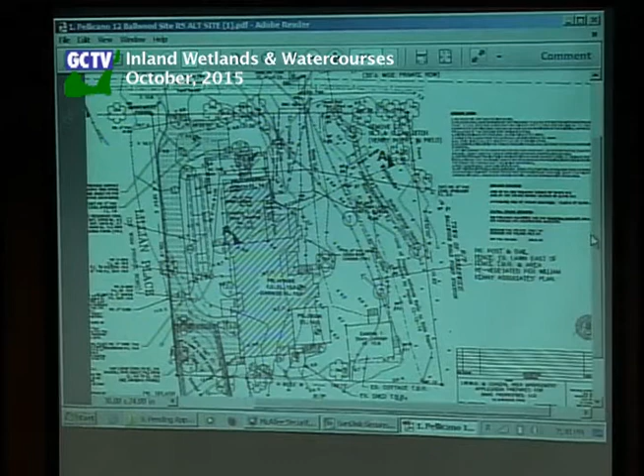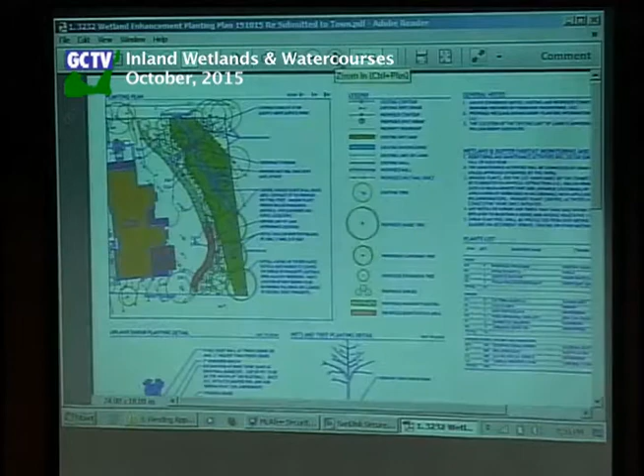The planting plan associated with the buffer, you would have in your packet as well. Doreen, do we have Bill Kenny's planting plan? Thank you.

So again, this is an illustration of the expanded buffer in areas where the residents don't need to use the land, being the north and south ends of the property. With the elimination of the cottage, additional area is available for planting and protecting the wetland to a greater extent.

Also today, I received an email from Ann Stoley. Is Ann here this evening? No. In summary, Ms. Stoley lists a fair number of issues associated with the Ballwood neighborhood, lighthouse, and ledge, consistent with the concerns we have heard from the public over the course of this application review—namely that those neighborhoods are subject to flooding, and their concern remains high regarding the flooding potential this development could bring.

There was emphasis that this applicant should be cleaning out more than just the watercourse on site, which is proposed as part of the application. In fact, the applicant should be looking at areas on town property next door, catch basins, and the like. I did forward this email to our Department of Public Works as well as the applicant's team so they were aware of the concerns, and perhaps they'll speak to it, perhaps not.

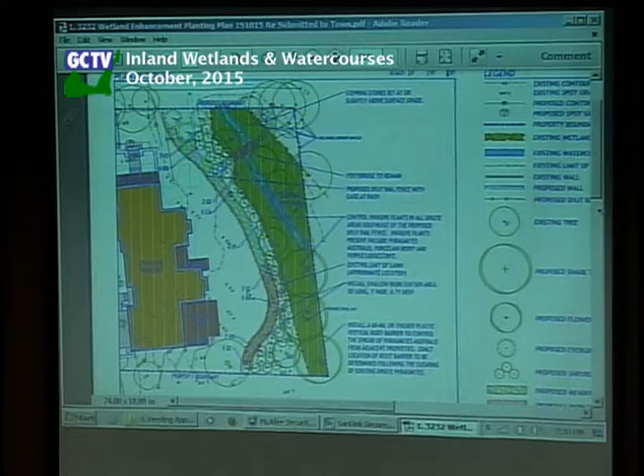I did hear back from Mr. Marucci of DPW, who said that the items here outside the premises of 12 Ballwood would not be the responsibility of the applicant, but instead would be the responsibility of the town. The prudent course of action would be to set up a meeting with the engineering department and Amy Siebert, the commissioner of DPW, and start to work on the issues from a whole perspective. In fact, it's not the responsibility of this applicant to take that on.

I believe that summarizes it. With the additional information submitted by the applicant, I feel comfortable that the feasible and prudent alternatives have been investigated, and there's been adequate demonstration why, for prudent engineering and feasibility reasons, other configurations of the driveway do not work, and that the increased buffer and protection of the wetland is in fact a more balanced use of the property than previously submitted. I would recommend approval with the special conditions listed in the staff report and the standard conditions that are our norm.

Okay, thank you, Pat. Welcome. Good evening, Mr. Chairman, members of the agency. For the record, John Hegney. We've reviewed Director Sesto's report. We agree with her findings. We are comfortable with the conditions, and we would ask for your approval.

Are there any agency questions for Mr. Hegney regarding this application as presented tonight? No? Okay, thank you. Are there any public questions or comments on this application? Okay, please come forward.

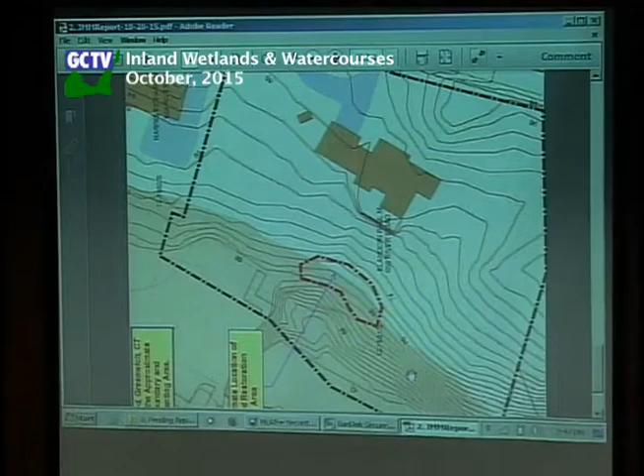But also part of the cease and correct was the area shown in red on the map, where some trees were removed associated with the Mianus River wetlands. I had no disagreement with the delineation done along the Mianus River. So, as Doreen said, we came up with, by her direction, 10 plant species and some trees, and I also added some larger shrubs. I thought it would add a little diversity.

I'm not sure how many folks have been to the site, but it's a full canopy while the understory is very open. So I figured not to block Mr. Blandori's view of the pond and the river, but also to add a little structure to the area. That was my reasoning behind adding some of the larger shrubs.

The off-site area, we reviewed that as well. The berm, I don't know when it was installed, but it was new. The ditch was clearly dug recently. There was some evidence of soil disturbance there in the past, and clearly the road has been discharging there for some time.

We again reviewed those soils, and by and large, we determined those soils to be of a somewhat poorly drained to moderately well-drained nature, and not a regulated area. But it does, and it will continue to, because the water is going to continue to go to the area, receive runoff essentially from River Road.

So can I ask you, are there any conditions in the staff report that you disagree with? No, I don't. I agree with everything that Doreen has said.

And we welcome staff to come on out and review the plantings prior to going in, or during going in, to make sure it was done correctly.

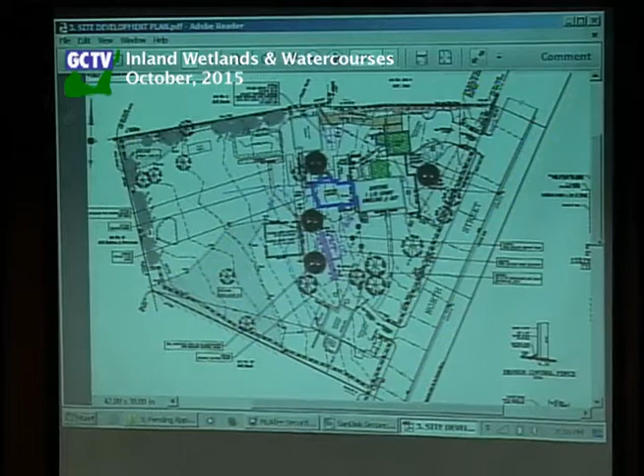So in the staff comments, there are conditions called out for the approval of the application, and the specific special condition is that a mitigation plan be prepared and submitted depicting 2 to 2.5 inch caliper native shade trees placed 25 feet on center within the portions of the wetland committed to being a meadow, in connection with the Inland Wetlands and Watercourse application 2005-45. There's a typo there.

So that would be my comments and my proposal. Welcome, good evening. Pete Finkmeyer with Soundview.

I spoke with my client this afternoon concerning the recommended conditions of approval, and the client has certainly conceded to the planting plan and putting in the trees and everything else in the staff report. Okay, let me be clear on that before I proceed.

A minor detail, if I may argue. Number 9 at the bottom of the special conditions, or 7, 8, and 9. Seven has to do with my certifications at the end of the project as part of the CO. Number 8 has to do with what the engineering division now requires, which we call the operations and maintenance plan, and includes inspection by engineers, logs, and everything else cited.

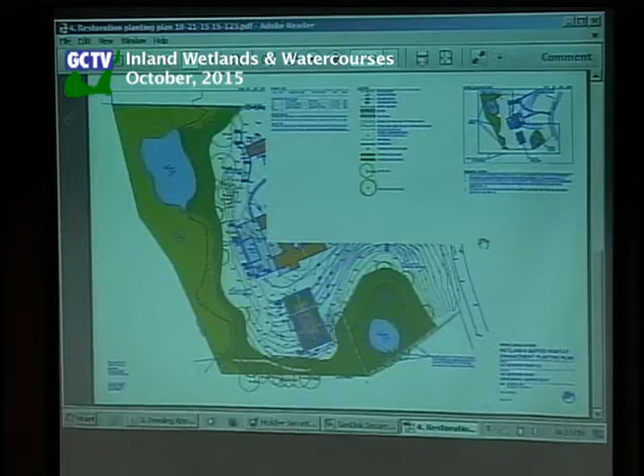Does any of that discussion have the potential to help with a decision this evening? Probably not. I'm not speaking for myself, but I guess my feeling is I think a prudent and feasible alternative could be slightly rotating the court to pull it away from the wetland. So I would like to see an investigation of that.

The only part that's in there is this little bit here. Anything else? Are there any other questions for the applicant from us? Is there any public comment or questions on this application?

Motion to delay? Is there a second to delay? Second. Okay, Stefan was in there first. All in favor? Aye. Okay, thank you. It's unfortunate.

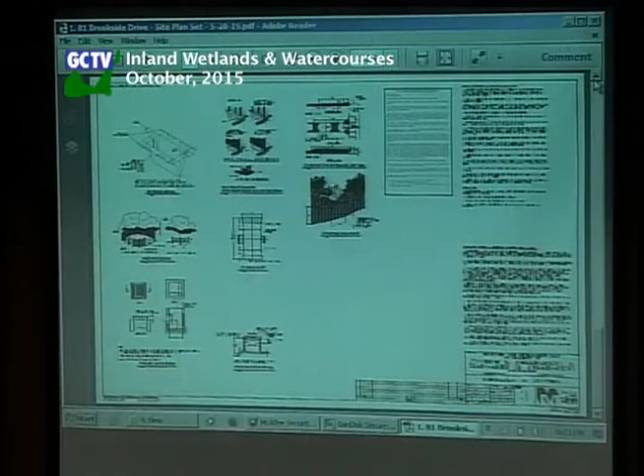2015-080, 81 Brookside Drive, S.E. Minor & Co., for Joseph and Margaret Pellegrino, for piping of a watercourse. This application actually might easily have been up with pending applications. It's been hanging with us for a pretty long time, and it was withdrawn this afternoon. Okay, so it's done. Very good.

2015-128, 33 Loeb Pond Road. S.E. Minor and Company for Paul Roche, for the construction of a pool house, carriage house, driveway, and drainage system, 40 feet from a pond.

Right, the agenda was not revised per changes that the applicant has made to their application. Since the application was made, they've eliminated the pool and the pool house from the proposal. I think there's also an infiltration system, maybe, or there was a meadow proposed to take drainage from that, and that's been taken off. So all those activities were in the woods over here.

Staff had some major issues with that proposal, so I'm happy to see that it's not on the plan, and if in the future the property owner wants to apply for a pool, they might explore putting it off the back of their house, holding it up with a retaining wall or something, which is a very common way to do it that I've seen around town on sloping sites like this.

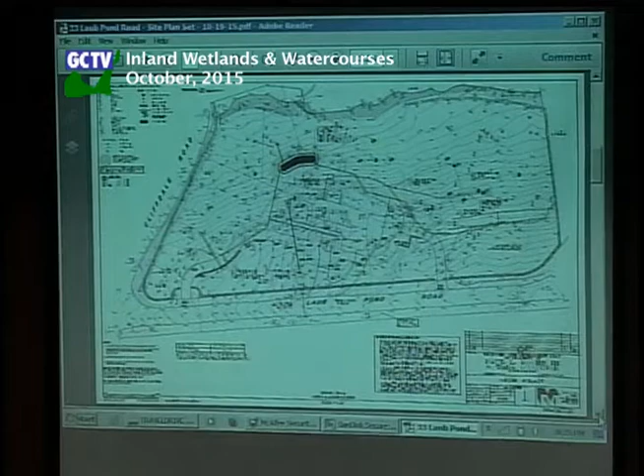There is some gully erosion to the south of the house that I've recommended the applicant repair, and I put a deadline on that - that's special condition number 1 - by October 31st of next year, whether or not the activities are implemented. So whether the driveway is built or anything else is done, this gully has to be fixed.

So after speaking with Mr. Marucci, if the agency feels comfortable adding that condition of prior review and approval by engineering, I'd recommend the agency issue a permit with the conditions in the staff report.

Are you attempting a sizable basement on this property, given the high groundwater? The basement isn't a very big footprint—this piece right here is the garage, so it's not a very large basement. We're kind of restricted because we had to move the house forward, and we have limited usable area on the site.

Is there a sump pump associated with the basement? Yeah, we have a sump pit or structure that will be connected to under-drains underneath the slab, and then it'll be pumped up into the storm drain. So it will not be going into the detention portion of the storm system? No, it will not. The detention stops at a wall in this structure, and the control structures are on this side of that wall, but the pump will go to the other side, unrestricted, out to the storm drain.

And where does the storm drain discharge? It goes into Long Island Sound, but I don't know exactly—it heads in the south direction. So you don't know the... but it is the true outflow? No, it's a true storm drain, an 18-inch clay pipe, I believe.

And the roof leaders, do they feed into it? Yep, all go to the roof storm drain, or leaders. We're kind of reversing—all the water from the house roof will drain back to the rain garden from this side as well as from this side. And we receive water from adjoining properties here, here, and there, which all feed into the rain garden. Even the back end of the lawn pitches back toward the rain garden, so we're going to collect our lawn area in here.

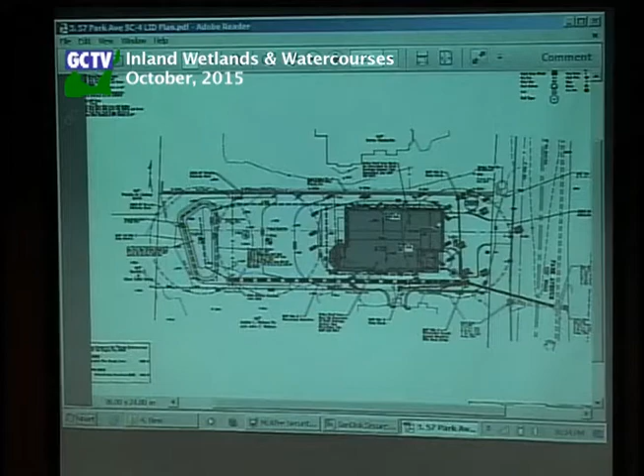So the staff report has some comments on the rain garden design—have those all been addressed, or what do you think? Yeah, I provided a separate letter with the revisions, including the liner. So staff is happy with us, right? Staff is happy.

Very good. Any other questions for the applicant? Are there any public questions or comments on this application? No?

I have a question for staff, maybe Pat. In the special conditions 1 and 2, maybe it's just the way I'm reading them, but the reference to the planting plan and the installed cost as part of the determination for the ultimate bond seems to be redundant in the second condition as well.

The first condition is the requirement for the applicant to submit an estimate for the cost of the planting plan, so we get an idea of what it would actually cost. The second condition calls for a bond to actually be posted. Now, pursuant to our discussion on Tuesday night, the agency did express some hesitation with going with the full approved value of the planting plan, suggesting some percentage of that would be more appropriate.

I did raise concerns about whether, practically into the future with new property owners perhaps, that level area that would be created near the house might entice someone to try to expand the house in that direction, build a garage, or do something else like that, which in turn would work against maintaining the restored wetland and wetland buffer area in a more natural state, because it would push residential and landscaping activities out of this area that they're creating next to the house.

I did speak to the applicant's agent and suggested that they consider if they have alternatives that would meet their landscaping desires without going in closer to the wetland, as the current proposal shows.

I also think the buffer demarcation, or the edge of lawn demarcation on another plan, sheet P3, was a little bit light, so I asked for a more robust demarcation feature, and I wanted some details as to how they propose to protect all of these plantings from deer, because the deer are all over the place back here.

Now, after conversing with Mr. Kwan and getting his positive feedback on these three points, I thought perhaps if we get to a point of resolution this evening, the agency might want to issue a permit. So I've passed out what I think is probably a pretty decent list of conditions that would apply to this application, but we need to hear what our applicant has for us this evening.

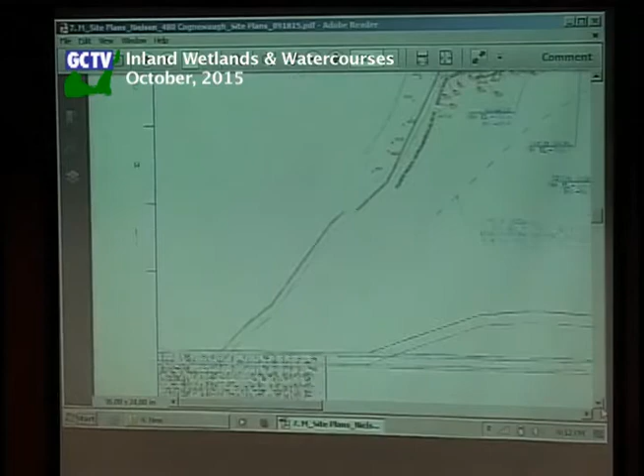This is the bump out. The existing wall goes more like this, and the bump out goes more like, sort of, this area, and the wetlands over here.

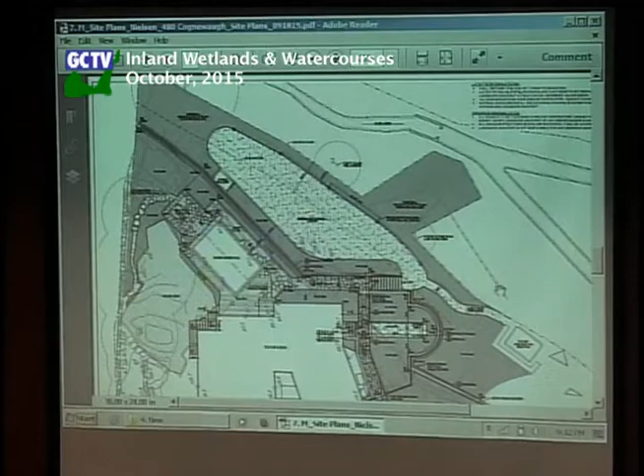Good evening. For the record, Mark Kwan for Cummin Associates, Landscape Architects.

My main points for our design proposal for increasing the terrace space: there's a significant amount of the property that's inaccessible to the clients because of the wetland and the watercourse. They're avid gardeners, but they have significant ledge conditions on their property which don't allow them to do that much gardening. They also had a pool installed earlier this year, and the site's been left in a devastating state on the terrace level due to the equipment access. So they want to create the terrace space to be more garden.

In doing so, they asked for some additional space at the terrace level. I see this as a true benefit to the site because the daily activity will be limited to the upper level in the terrace. There won't be any necessary activity down closer to the wetland in the buffer area. Also, on the perimeter of the terrace is going to be pool enclosure fencing, minimum of 4 feet, with self-closing, self-latching gates. So that's again going to promote more of the daily activity up at the terrace level. Increasing the square footage of the terrace is going to give them more space for achieving their gardening ambitions.

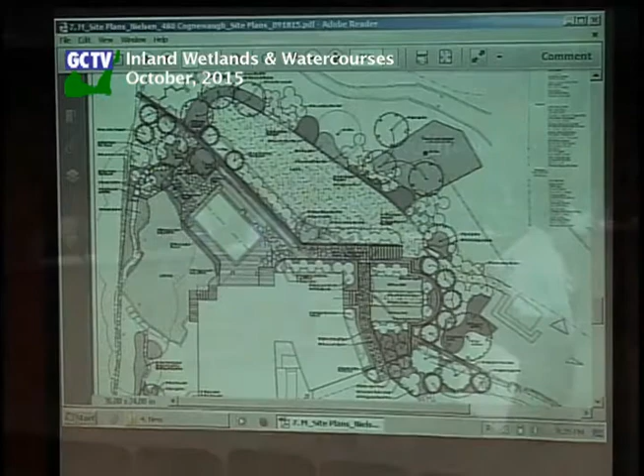Right, yes, because if the deer repellent doesn't get applied and all of a sudden you lose half your plantings, we need to be able to go back and have those reinstalled. I'm assuming that the deer repellent that is used, and maybe this is more of a question for staff, has no potential harmful effects to wetlands.

Not that I've ever heard of. It's putrid egg and other gross things, Tabasco and sorts of things. Not Tabasco brand, per se. Got it, okay.

Are there any other agency questions? Comments? Any public questions or comments on this application? No? You look like you're poised to make a motion.

I would make a motion to approve with the conditions that Bob has suggested, plus an additional clause based on the wholesale value of the applicable plantings, to increase the bond amount. That's inartfully stated, but...

I'll second it. Okay, all in favor? Thank you. Norma is opposed to that. Okay.

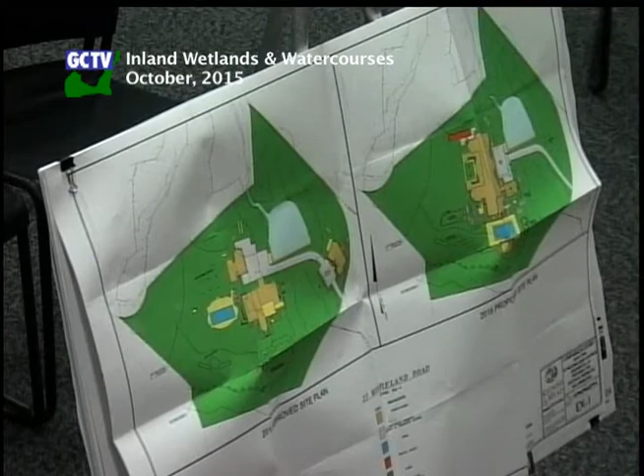They are going to be using more low-impact development drainage features than previously proposed. They are going to demolish the existing pool and want to build a new pool behind the house, in that location flashed right there.

All of these changes have actually come with what amounts to a better drainage design, in my opinion. It's going to reduce peak runoff rates over existing conditions between the 25 and 100-year storms, and the peak volumes would be reduced beyond the required one-year storm event. The DPW has reviewed the drainage design and found it to be acceptable.

I state in the staff report that this comparison exhibit shows that the extent of activities don't really expand at all toward the wetland beyond what was previously approved. I would note also that the landscaping plan with this current application is more extensive in the important area to the south of the house and the pool retaining wall, and that things have in a way gotten better over time, which we don't always see.

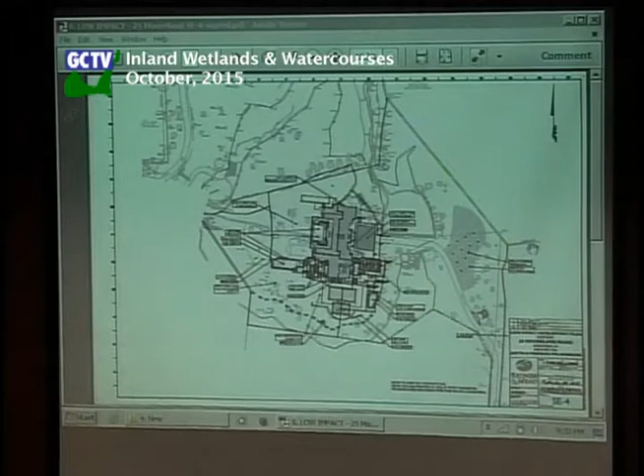I guess that's about it. I'd wait to hear what Mr. Ginter has to say about that point, but I do recommend the agency issue a permit with the conditions provided in the staff report. Thank you, Bob.

Welcome. Thank you. Good evening. David Ginter from Redniss & Mead, here on behalf of the applicant. Also with me tonight is Corey Jorgensen from Wesley Stout Associates, the landscape architect, to be able to address any questions relating to the landscaping.

One item I'd like to note before we get going: I don't believe it was included on my site plans, a slight oversight on my part. Pool equipment was not located, I don't believe, on the landscape architect's plan either. I could be mistaken, but we have shown just to the south of the proposed retaining wall, on the lower side, is where the pool equipment wants to go. So again, I apologize for not having that on our site plans as part of this originally.

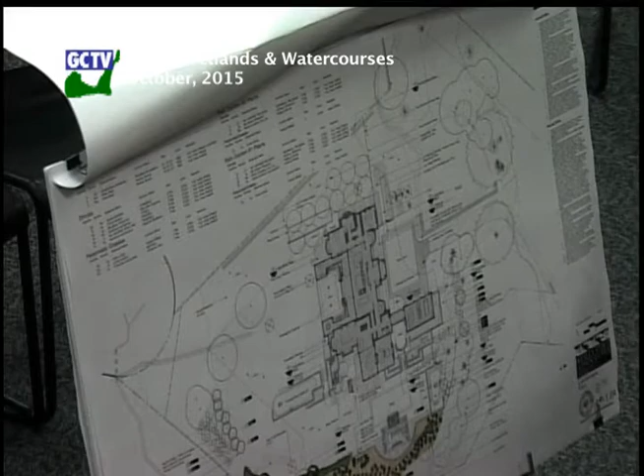We have reviewed engineering comments and have no issues with any of the items addressed in there. One of the comments that might affect your review and approval of this tonight had to do with the rain garden on the western side of the property. Mr. Marucci noted that in our calculations, one of the elevations was a little too close to the mottling. We've reviewed the calculations, and the size of the rain garden does not change. We will adjust the soil depth a little bit to accommodate it, but the footprint does not change.

So if there was any concerns about that, we have no issues with it. We did receive Health Department approval today. The permit to construct will be issued once the contractor has been selected and goes in and pulls the permit, but written approval was issued today for us.

Regarding the boulder demarcation feature, Corey will be passing out 11 by 17s for you of the plan that's in front of you here. What we have done in response to Mr. Clause's comments is we have pulled the demarcation wall back to be in line with the deer fencing, from approximately the midpoint of the half wall, the half circle wall behind the pool structure, to the west. So it's been moved inland approximately 10 to 15 feet from what was previously proposed.

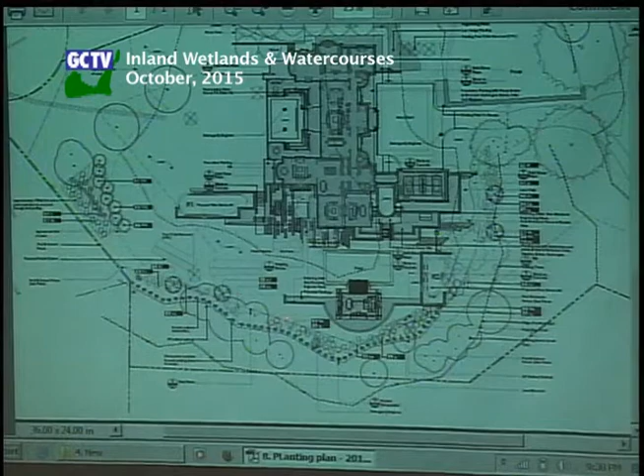It's not lawn, it's grass. It's just natural - there's no lawn down there. Herbaceous material? Special condition 6, I'm recommending that any turf grass to the south of the boulder demarcation be abandoned. So basically, the edge of landscaping is going to end up being your new edge of landscaping plan that runs up against this wall. So everything to the south, adjacent to the wetland, no lawn.

That's correct. Yes. If you look at the plan, we have a line that delineates the edge of lawn, and that's where Mr. Clausy had pointed out. And I'm not meaning to be difficult, but can you just explain to me when you use the term lawn, what it is you're envisioning?

Turf grass. Or so managed? Managed, mowed, irrigated, fertilized. So when I am speaking about lawn, this area down here, it's not naturally occurring vegetation - it's fescues or rye, or it's unmaintained lawn. Unmaintained, that is correct. Yes, maybe that's the difference.

So that's just going to stop being mowed, or is there a plan to supplement it with seed, to give it a jump in a certain direction? Yeah, there is not a plan currently to seed it, but we can certainly implement a plan to seed it to give it a jump start, but it will not be maintained. And we also added a layer next to the lawn for that purpose as well, to give it a transition between the lawn and the buffer. That's why we introduced some grasses, ferns, and other things that can grow along that edge to really delineate it along that maintained lawn. Thank you.

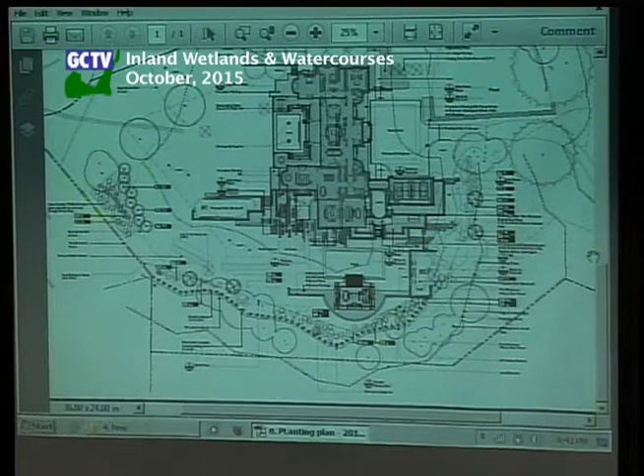Is there a second? Yes, I will second it. Thank you. Is there all in agreement? Yes. Okay, very good. Thank you.

Okay, next up, 2015-1, actually, no, did we just do that? We just did that. That was Hill and Brand, right? Okay.

2015-144, 613 Riversville Road / 100 North Porchuck Road for National Audubon Society for dredging of pond and gazebo 15 feet from wetlands.

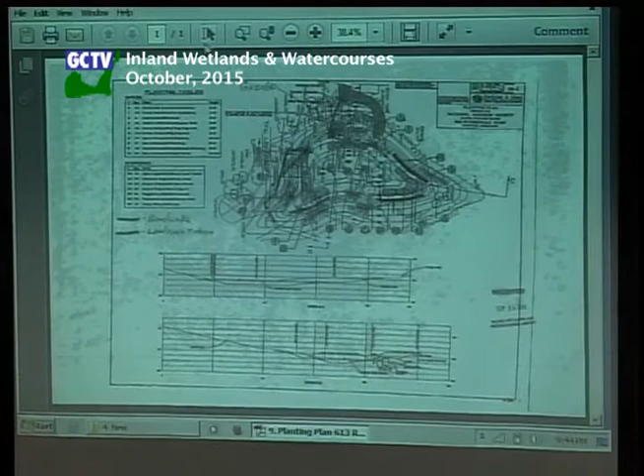This is the plan that was actually approved back in 1999, and Audubon is looking simply to reestablish what was there, with some exceptions. They are proposing a gazebo just on the other side of the trail that runs around the perimeter of the pond.

The gazebo would be set on sonotubes to compensate for the slope that drops down behind it. It would be a resting location for people using the trail, but would also serve as a teaching pavilion, especially helpful in the event of inclement weather.

There are a series of boardwalks that run along the perimeter of the pond, allowing visitors to get up close to what's in the pond. The day I was out there, a couple of young boys were thrilled to be nose to nose with the frogs. The existing boardwalks will be removed and/or rebuilt.

They need to be a bit wider. Right now, only one-way traffic is passable. Over here there'll be another section which would allow students to line up in one controllable location so that we don't lose any.

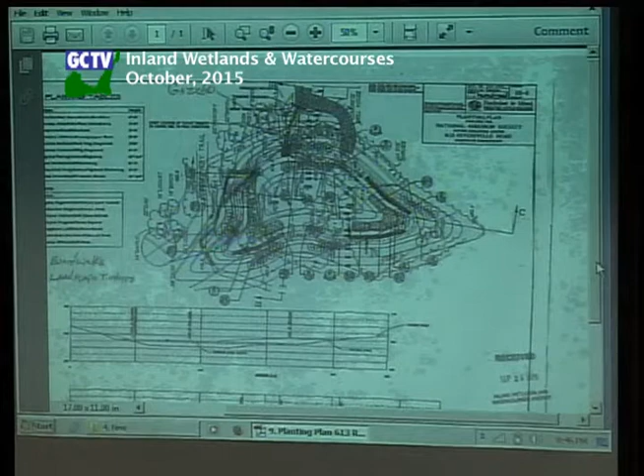The pond spoils, which amount to about 250 cubic yards of material, are donated to the pond via drainage from the north portion of the property. Through the orchards there's some erosion that contributes, along with natural accumulation of sediment. The pond doesn't have a regular outflow, meaning it's not in a continual stream, so the sediment that comes there very effectively settles out, much to the advantage of the down-gradient wetland.

The pond actually does have an overflow that winds up in wet areas down here, so the pond is doing a pretty good job of protecting those areas. The 250 cubic yards will be removed from the pond and deposited within about 60 feet of the edge, in what is now a meadow consumed with porcelain berry.

Access will come through the existing farm-developed portions of the property, so there will be no new disturbed areas. The sediment is proposed to sit through the winter to completely dewater, and then be spread about a foot deep or so in the area outlined on the plan before you.

The silt fence for the initial phase will be particular to the pile of spoils, and then will be reconfigured in the spring to protect the perimeter of the spread spoils.

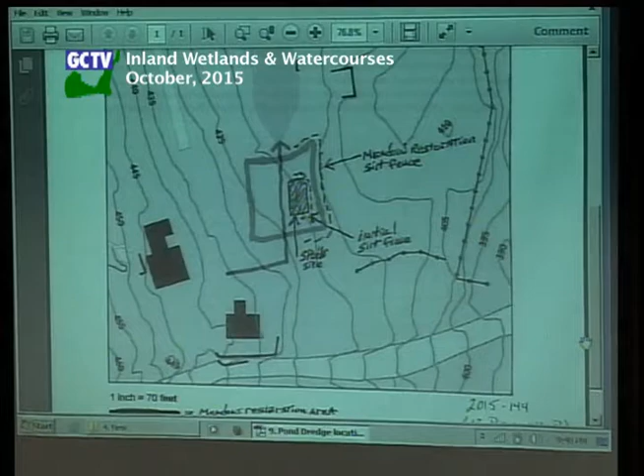Getting rid of the porcelain berry—Audubon has a pretty significant issue with it, so this weighs in among the habitat improvement efforts to restore the meadow, which would be beneficial to more organisms than the porcelain berry. Provided the erosion and sediment control is managed, I don't think there'll be any threat to down-gradient wetlands.

The plans are a resubmission of those from 1999, and some drawings lack perhaps some detail that the agency is more commonly used to seeing.

My conditions include the requirement for a member of staff to meet on site with the contractor prior to the beginning of work, so we can talk through the details and make sure we're all interpreting the plans consistently. I don't think it's a difficult project to manage, so I'm not particularly bothered by the level of detail—it's just a matter of having a conversation to be sure we're all on board. So with that, and the other conditions outlined in my staff report, I would recommend approval of the project.

Thank you, Pat. Would you like to say anything?

Andy Chapin for Audubon. I agree with Pat. Just one clarification: there is no stream flowing into the pond—it's drainage ditches from various parts of the property that flow into it. It's a man-made structure from the beginning.

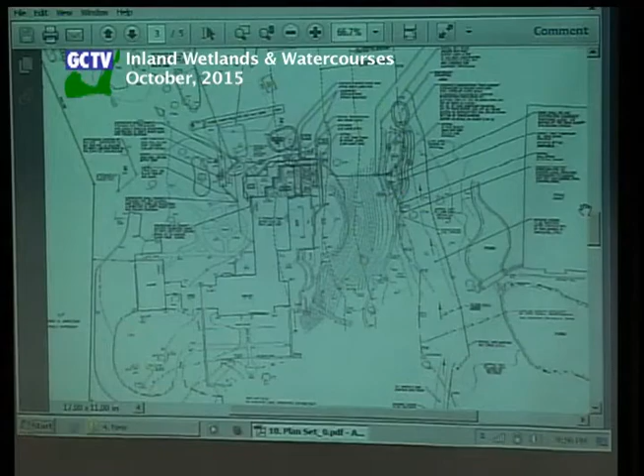The only thing I would add to Bob's summary is that the 250 square feet of wetland is really already a lawn, so we're creating a functional retention area and infiltration basin within that lawn. So we're reclaiming the lawn. And then, as Bob pointed out, we did have the planting plan submitted shortly after the initial staff comments.

I did also want to point out that, as one of the conditions, you wanted a packet of information so the owner knows what it has to do as far as maintenance. That's something we typically do for the engineering department, in accordance with the drainage manual. So that document would be prepared - we call it the long-term maintenance plan, which gets filed with all the as-built plans. That will be submitted to the agency staff at the conclusion of construction.

It's a question for you, Tony. So what is feeding the rain garden? Is this surface water? When we increase impervious area by somewhere between 500 and 1,000 square feet, we have to infiltrate that increase from that impervious area. And that's what it's designed to do for the 10-year storm.

So it's a volume, given the fact that we have a steep slope between the development area and the wetland. The most appropriate spot seemed to be at the bottom of the hill, where on previous applications you had already approved some activities which included a level spreader. So we're reclaiming the lawn and then infiltrating back any overflow that may occur beyond a 10-year storm through the level spreader. So we're constantly feeding the edge of the shallow portion of the pond.